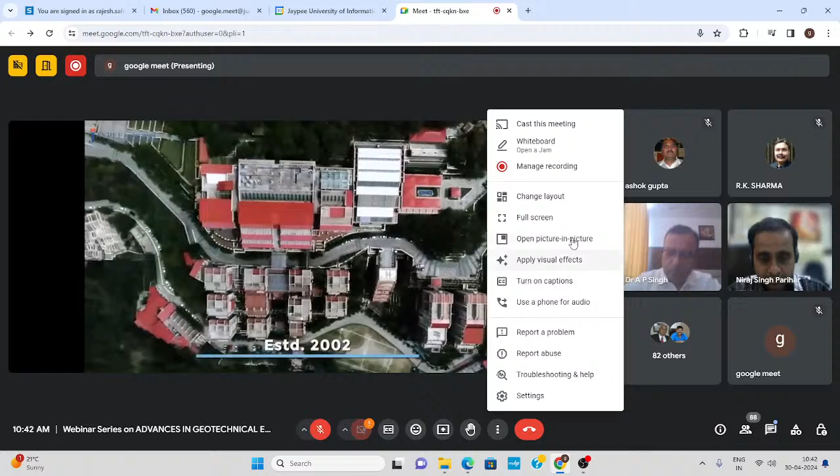Conceived as the joint vision of the Government of Himachal Pradesh and the founder chairman of Jaypee Group, Shri Jaiprakash Gaur, JUIT Solan is the first private university of Himachal Pradesh, established in 2002. Over the last two decades, JUIT Solan has been relentlessly pursuing its mission of contributing to a better world by cultivating creativity and advancing fundamental knowledge through education among students.

Adorning the picturesque slopes of Waknaghat hills in the Solan district of Himachal Pradesh, the university campus spread across 25 acres provides a peaceful and serene setting in the lap of nature for young minds to hone their skills for a brighter future.

JUIT offers undergraduate, postgraduate, and doctoral programs in various fields of study, including computer science and engineering, information technology, electronics and communication engineering, biotechnology, bioinformatics, civil engineering, and management. JUIT has been producing polished graduates who are working as experts in various fields in the country and abroad. More than 200 alumni have become acclaimed professionals in countries like Canada, America, and also Europe.

As Dean Academics and Research, I have had the privilege of witnessing a remarkable journey here. We aim to provide an educational opportunity to one and all, irrespective of their background. In JUIT, our main aim is to produce industry-ready professionals and good human beings.

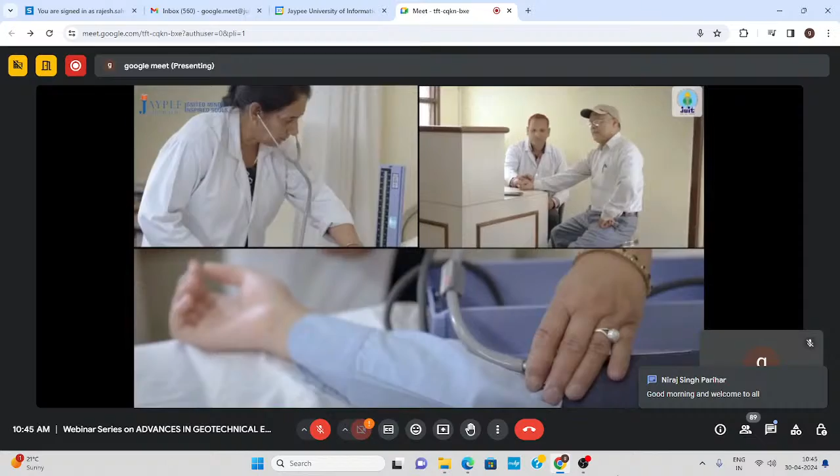The university campus makes life vibrant and enjoyable for students, both inside and outside the classroom. Handling 1900 students in the age group of 17 to 23 years is challenging.

In JUIT, we create a conducive ecosystem for a student to develop and nurture his or her personality besides the academic curriculum, providing excellent amenities in the hostels, good nutritious food, active sports fields, vibrant and diverse co-curricular activities clubs, NCC, etc. These are all domains which fall in my responsibility as the Dean of Student Welfare.

The university exposes its students to placement teams from several well-known companies, and the students here in this university get placements in organizations like Microsoft and Amazon.

JUIT Solan stands tall as an institution committed to academic excellence, holistic development, and industry relevance. With its focus on research and innovation, as JUIT graduates step into the professional world, they carry with them not only knowledge but also the skills, values, and perspectives necessary to make a positive impact on society.

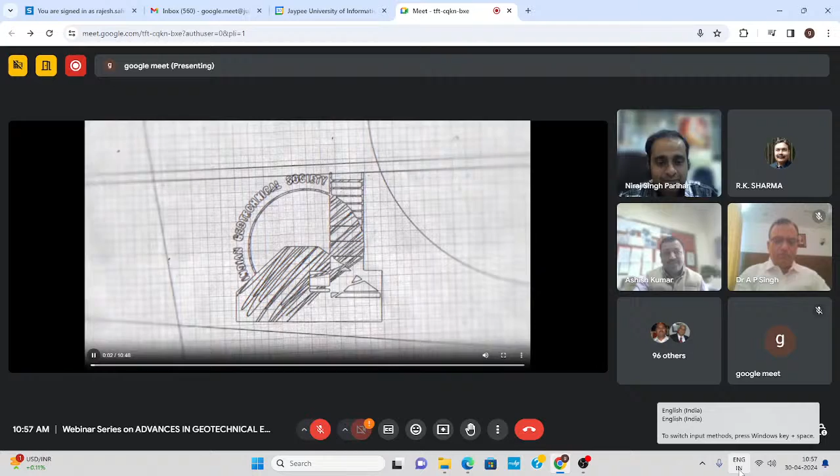The Indian Geotechnical Society, earlier known as the Indian National Society of Soil Mechanics and Foundation Engineering, was established in 1948, soon after the Second International Conference on Soil Mechanics and Foundation Engineering held in Rotterdam. The society was affiliated to the International Society that same year and has since strived to fulfill and promote its objectives.

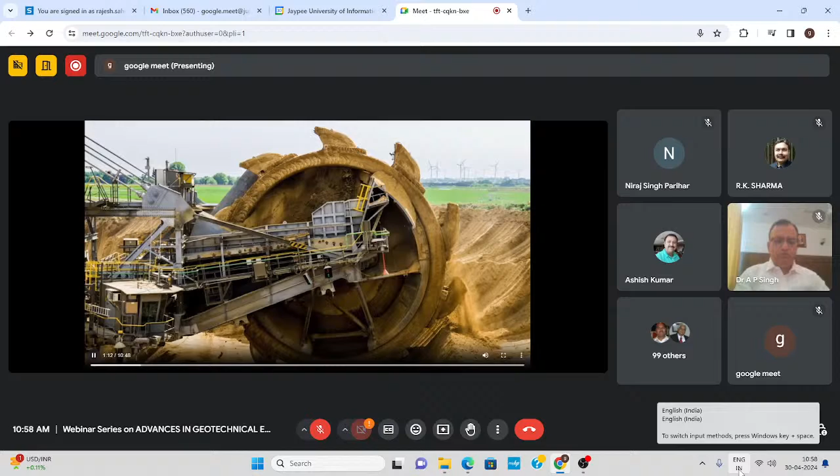The name Indian Geotechnical Society was adopted in 1970. The vision of founding president Mr. Khosla and honorary secretary Dr. N.D. Gulati was to build the society to promote cooperation amongst engineers and scientists for the advancement and dissemination of knowledge in soil mechanics, foundation engineering, soil dynamics, engineering geology, rock mechanics, snow and ice mechanics, and allied fields and their practical applications.

As the geotechnical community grew, the International Society decided to hold regional conferences for each continent along with four-yearly international conferences. The first Asian Regional Conference was held in 1960 in New Delhi. India also hosted the 5th Asian Regional Conference at Bangalore in 1975, and the 13th at Kolkata in 2007.

IGS has been organizing national conferences annually in different cities since 1961. The Silver Jubilee Conference was held at Kurukshetra in 1973. The 1978 GeoCon was a landmark conference held at IIT Delhi, inaugurated by the then Prime Minister Morarji Desai.

IGS started the prestigious annual lecture in 1978, a tradition followed till date. The first one was delivered by Professor R.K. Katti. Several others who delivered the annual lectures include Professor Dinesh Mohan, Professor T. Ramamurthy, Dr. R.K. Bhandari, Professor Gopal Ranjan, Dr. B.G. Rao, Dr. N.V. Nayak, Professor G.V. Rao, Professor A.V. Shroff, and most recently Professor M.N. Viladkar.

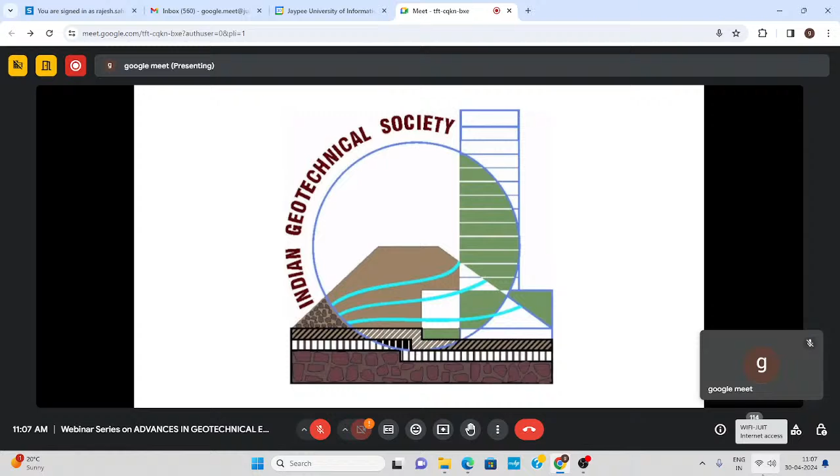As we celebrate the 70th year of the Indian Geotechnical Society, the possibilities that we look forward to are limitless. Here's to saluting the past, celebrating the present, and welcoming the future.

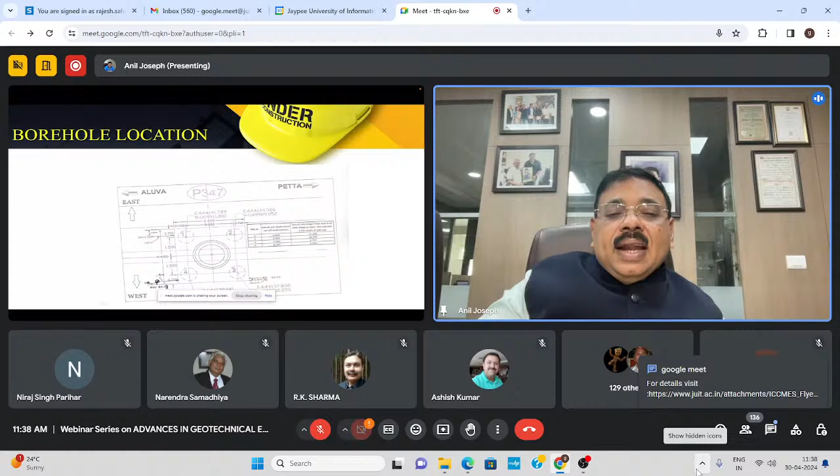So why has it happened suddenly? Because there was heavy flooding in the previous season, and due to this imposed loading, the frictional component has totally gone, and the soil started pressing into the softer formation. So everything was studied in detail.

So now, as a forensic investigation, we found out the reason for that, and now we have to come up with a solution. The trains are running on the top, we cannot dismantle everything. So we decided to underpin the tilting pier cap and the foundation. We went in for an additional 4 piles, and underpinning was carried out.

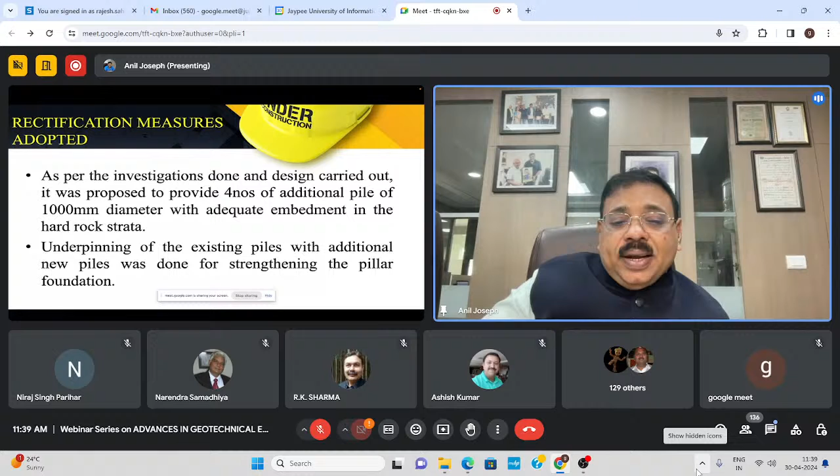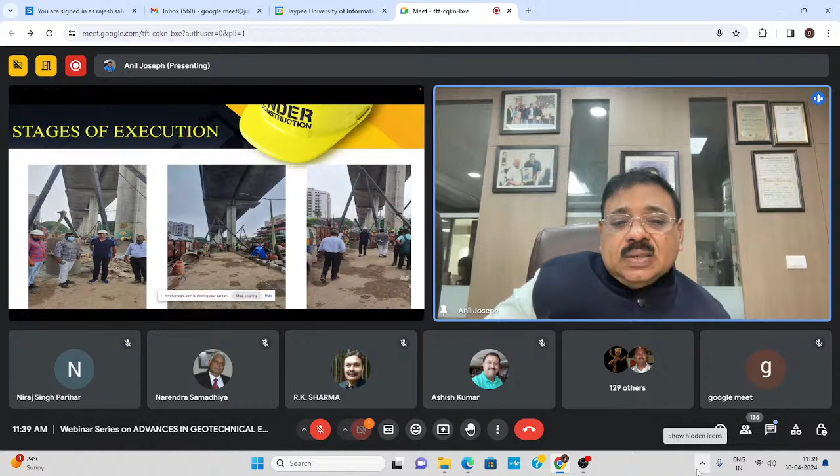So here you can see myself guiding the team, and we cannot bring in big hydraulic machines because the trains are already running on top and we cannot disturb the system. So a 24/7 monitoring mechanism was done. The work was carried out, and specialized equipment like chiseling systems and breaking the rock to get 1.5 meter anchorage using hydraulic drill systems was also implemented. The work was progressing slowly, and the integrity test was conducted.

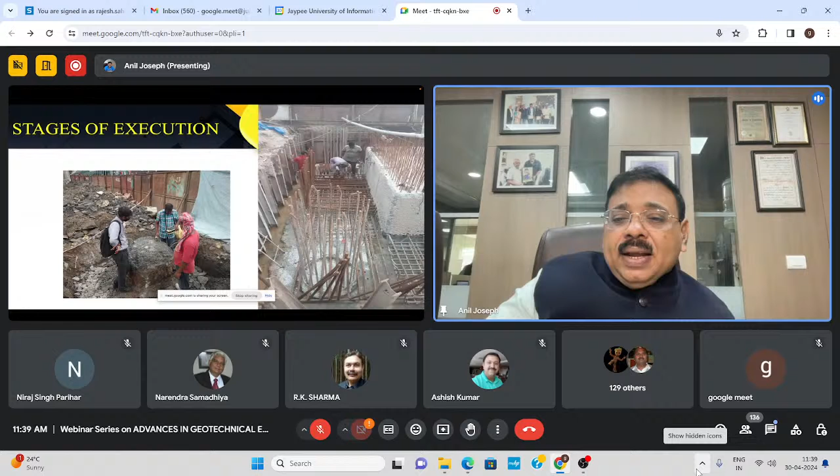Now here in this picture you can see the additional pile getting done, and we are anchoring using high strength Hilti anchors. About 1,400 rods were anchored into the old pile cap to connect it together with the new one. And now you can see here the old pile cap, and the new pile cap where the loads will get transferred, and strong structural systems were also made so that the load gets bypassed to the new pile system.

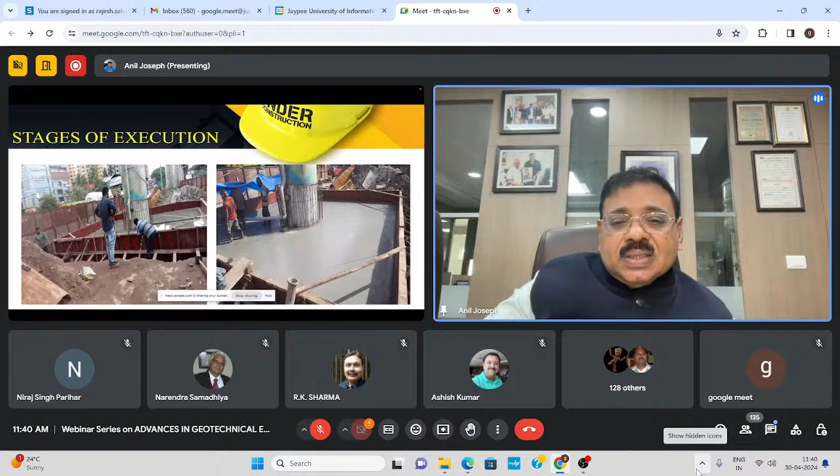And in order to prevent the damage, this time we have taken the casing down to the bottom up to the rock to ensure that there is no side collapse happening, and the concreting is done immediately. So the entire work was completed. The entire thing was observed, and we found that everything has become stable, and now we are able to successfully get the lines running, and both the metros are running parallelly, and it's all solved, and it's still being continuously monitored. This was done last year. So this was my first story.

And my second story again deals with a failure of a touch pile system for a commercial building at Cochin. And if we come to Cochin, some of the world's best cruises come and visit us. And we have a very beautiful natural harbor. This is protected, so we don't need any breakwater structures. And this is where the city is. This is the natural protection, and we have a huge LNG terminal here.

And we have a beautiful Dubai port project here with the container terminal, and this is the LNG terminal, and the ships come in and sail into our harbor. So these are all the shipping facilities available, and we have a lot of fishing nets. These are the so-called Chinese fishing nets, and fishing is one of the major industries here.

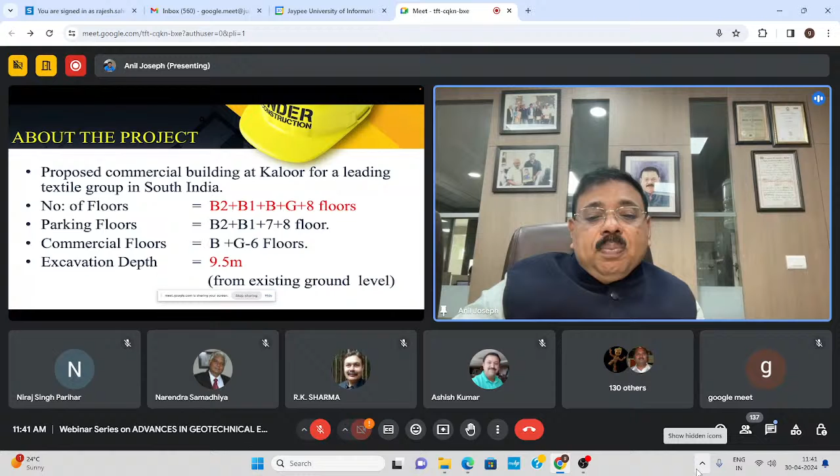So this story is of a commercial building having 3 basements, ground and 8 floors. They had parking floors at the basements and ground, and 7 and 8 was parking, and the other areas were commercial floors. So they had to excavate to a depth of 9.5 meter, and this was the location of the project.

And in order to make this excavation going up to about 10 meter, they had 337 piles of 90 centimeter diameter going to a depth of 30 meter. And they also provided 28 soldier piles of 600 mm diameter to a depth of 30 meter. Building piles were taken to a very dense sand strata at a depth of 43 to 46 meter.

And why have we gone for this touch pile with a propped system? Because once you have a cantilever, it is WL²/2. The moment you have a propping at the top, it becomes WL²/8, as a propped cantilever, and bending moments come drastically down. And the soldier pile is to economize the design of the strutting systems, because the span gets controlled with the soldier pile as a support in between, so the section can be optimized. So these are applications of basic engineering knowledge in the field.

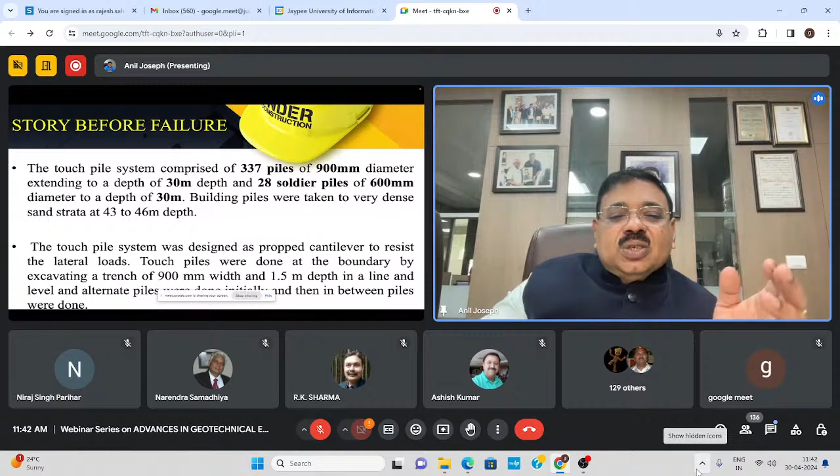So the work was carried out there. In phase 1, they went up to 2 meter. Phase 2, they went up to 6.5 meter, and phase 3, they went up to 9.5 meter. And here you can see a video when the work is going on. So this is at 5:30 in the evening.

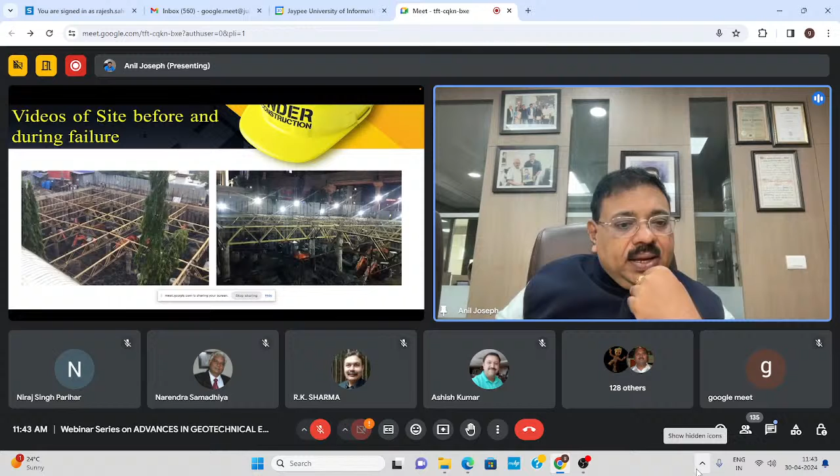So you can see that the work here is the touch pile system, all in place. This is the strutting system. This is the soldier pile, and work is going on full-fledged. So by about 7 o'clock, there was a slight movement, and the wall started creaking, sounds started happening.

The engineer in charge was a very young, dynamic engineer, so he immediately informed the district disaster management team headed by the district collector that such a problem is happening at this site. And I was representing the district disaster management as the engineer, structural engineer, and foundation engineering expert. And I was asked by the district collector to go and have a look.

So by the time we reached there by 8 o'clock, we see that there are about 20 to 30 people working below and trying to provide support to the structure. And immediately we asked to evacuate those people. And by 9 o'clock, this is what happened.

So here you can see that as the thrust became higher from the retaining wall, it started pushing, and the soldier pile got sheared off, and the strutting system failed. So suddenly movement jumped, and the failure happened. So this is what happened, and this is the write-up of that.

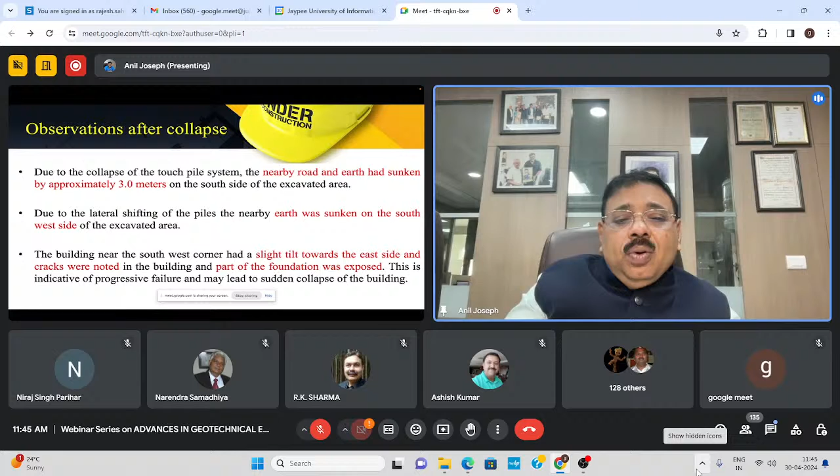So here, if you really see, you can see the equipment lying down below. The strutting system failed. The nearby road has gone down. Earth sunk slightly towards the side, and there were cracks. Electricity and water supply got disrupted. The roads got stuck, and the Kochi metro also came to a halt, because we have to analyze what went wrong before allowing the traffic to move on.

And again, a committee was formed to find out the reason for the collapse of the touch pile system, whether they had satisfactorily obtained the statutory government approval, and whether we will be able to do the construction using this touch pile system again. So these were the steps taken by the district management committee, and I was taking the structural engineering lead role in that.

So we rerouted the public traffic, refilled the excavated area, 2-layer sheet piles were provided, and the inner side of the sheet pile was filled to counter the lateral force. Because once it is a 10-meter cantilever, it is WH cubed by 6, and if we can fill it by 5 meters, then it is much safer.

The core test and integrity test were carried out to find out the root cause, and to rework the road and bring it back, we went for coconut pile systems, and we made innovative geocell formations to control the loading, and within 4 days we were able to get the road back on track, and additional soil investigation was carried out.

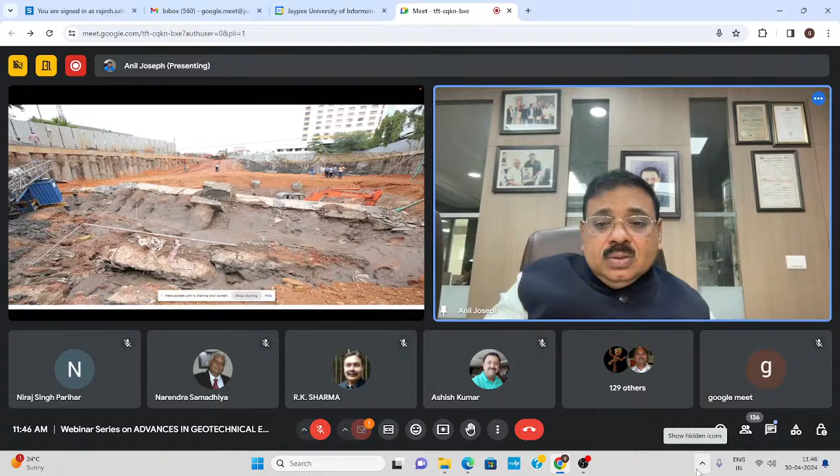So here you can see that the pile has come out, and the works are being coordinated. Here I am instructing the team how to go about it, and here you can see the double sheet piling system, and here is where the metro was running, and this is the refilling that was done to control the pressure and to understand what has gone wrong.

So this is the double layer sheet piling system, braced, and you can see that the pore pressure dissipation system was provided, and water was drained out in order to prevent damage. And then we went for concrete core test, pile integrity test, additional soil investigation, and then all these data were collected, and then we went for geotechnical and structural analysis using Plaxis and STAAD models to work out the root cause of the problem.

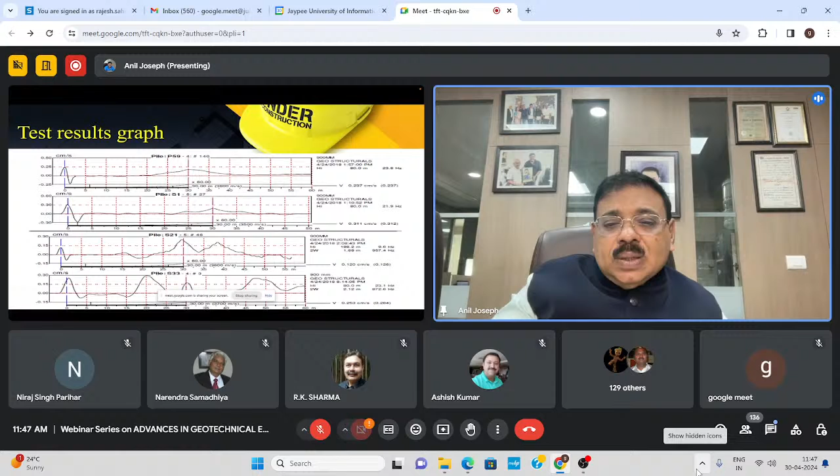So here, this is the integrity, core, and soil test happening. And we found that, again, the strength of the concrete was good. The depth of the pile was 30 meters. And the integrity test pointed out that the pile was sheared at a depth of 14.5 to 15 meters. Thanks to the Geodynamics team led by Ravi Kiran, who supported me in this testing process.

And this is the soil report, and the design was studied with in-depth analysis models, and the capacity was worked out. So we found that this 90 centimeter dia pile going to 30 meters with the reinforcement provided can take a capacity of 815 kilonewton meter.

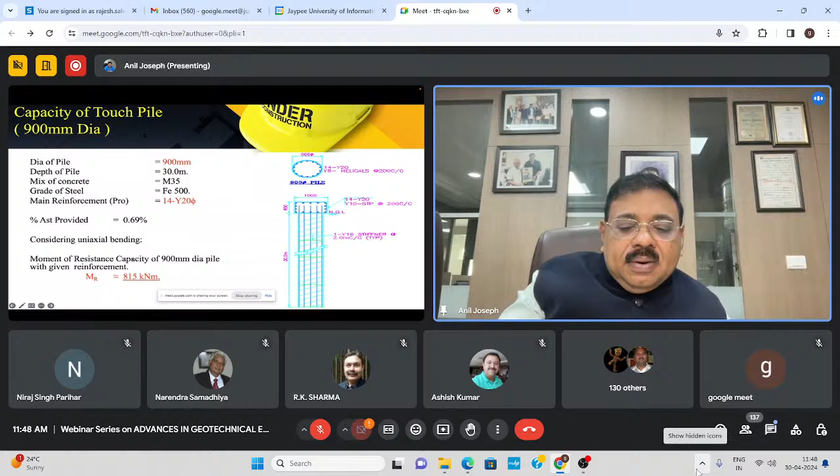Then we did modeling on different cases, because we have to convince the authorities also what went wrong. So 5 meter retention, 6, 7.5, 9.5, various case studies were done. At 5 meters, we found the factor of safety is quite good. There is no problem.

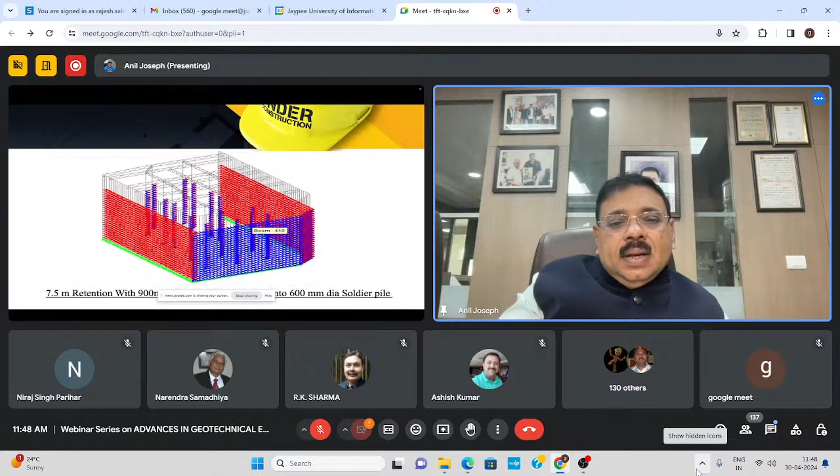At 6 meters it is still a temporary structure; a factor of safety of 1.3 is there. And once we move to 7.5 meters, the touch pile alone cannot take care. So we should have the strutting system and the soldier pile working to control the system. So this was the strutting system. And this is the three-dimensional model with the springs formed to simulate.

And this is the utilization ratio of the truss elements worked out. And we found that at 7.5 meters, it was also nearing the limit. And once we moved to 9.5 meters, we found that the moments are much higher. The strutting system was a bit inadequate to handle that. So here you can see that these are the soldier piles.

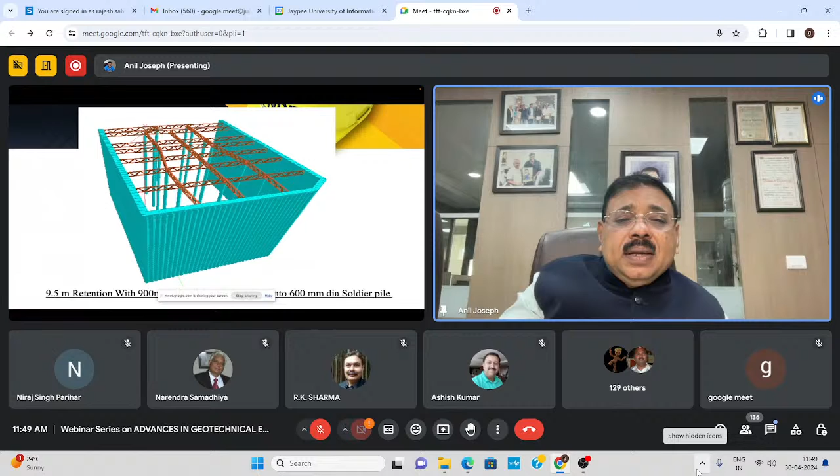The strutting system was modeled and analyzed, and we found that the strut system was inadequate. The soft soil has yielded and liquefaction has happened. And for the point of fulcrum in the design, they had assumed that after 10 meters there is fixity. It moved down to 14 to 15 meters, and the moments jumped drastically. And that was the major reason for the collapse, leading to increased unsupported length, and a second tier of strut system at lower depth could have prevented this.

So the analysis was carried out, diagonal cross bracings were suggested, and we asked them to move it back by another 5 meters, and we have given them permission with the second tier of strutting to carry out the work and complete the process. So it was just sheer luck and timely intervention that there was no loss of human life. And there was only one building which had to be dismantled because its foundation got exposed and it got tilted, and everything was carried out.

The rework was done with total instrumentation and monitoring, and the entire thing is completed, and the work is open and is functioning right now as a textile showroom. So here you can see the metro also.

So now coming to the third story of monitoring vibration impact during high-rise demolition, and we'll take you to Delhi for the story of the Supertech Twin Tower, Noida. In my career, I have been a structural engineer primarily, more than a geotechnical engineer, and I have done more than 3,500 high-rise structures. And there were a few stories where I had to become the demolition expert also to get the building down.

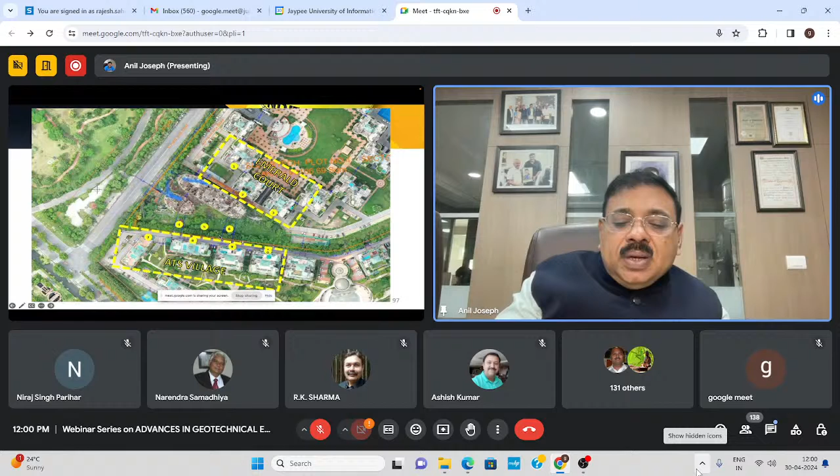And thanks to CBRI, which was appointed by the Supreme Court to be part of that. The way I was representing Government of Kerala in the 2020 blast, this time we had CBRI checking our design and verifying all the documents which we are submitting from the engineering perspective. So every wall, every crack was monitored, measured, and put into record.

And also I insisted on having the current strength of that by going for NDT testing, such as rebound hammer, pulse velocity, and all records were made and submitted to court before the blast. And after the blast was completed, we did the resurvey to assess what was the damage. And in case of any damage happening, the entire area was insured for 125 crores.

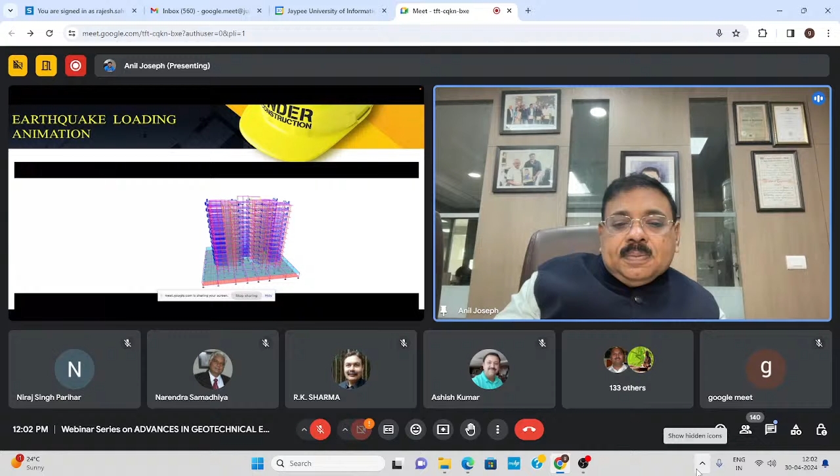So here you can see in this video how the behavior is happening and how the building is oscillating under the impacts which happen during an earthquake in this case. And when we move to this video, it shows how the blast is going to affect, and we have to ensure that the structures are safe during that process. So here you can see that the buildings are moving, what is the effect, and we compared with the earthquake modeling.

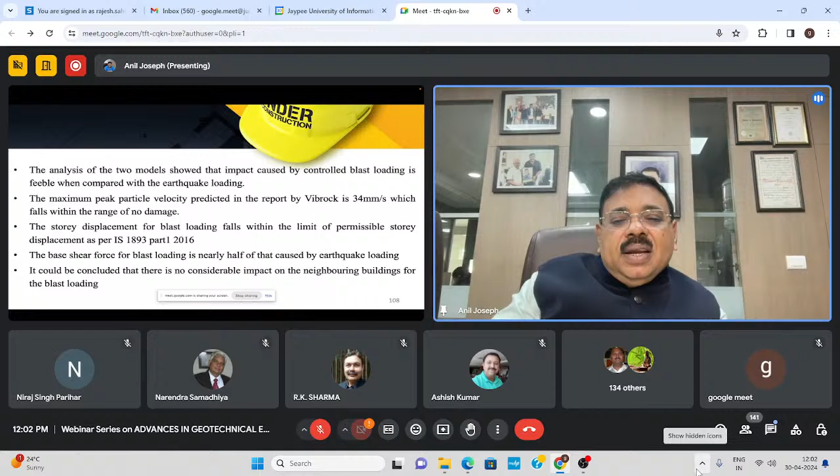And also you have to do stage-wise analysis because we are ripping the building. So you have to ensure that the building is safe in all the different processes, even if an earthquake comes and hits the building during the time of the operation where you are doing the preparatory work. So that was also carried out. That's why it took almost 6 months of engineering to do the job, and everything was simulated. And as per the code, we proved that it is safe.

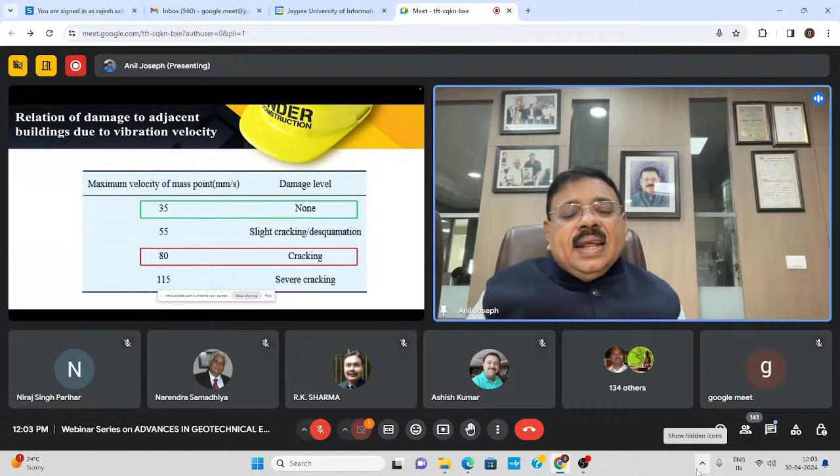And it is very simple. If you can control the impact to less than 3.5 centimeter per second, there won't be any damage. And if it is more than 11.5 centimeter, the entire surrounding buildings will have heavy damages. So I would like to thank the team from IIT Madras, headed by Professor Boominathan, who was part of the team to measure the vibration impact.

So we had accelerometers, geophones, all spread across the area, picking all the data when exactly what is going to happen. So we had to evacuate about 5,000 people, about 3,000 cars, 300 pets, and we had about 40 ambulances ready and 400 bed hospitals ready, so that in the case of an eventuality, the emergency can be put into operation.

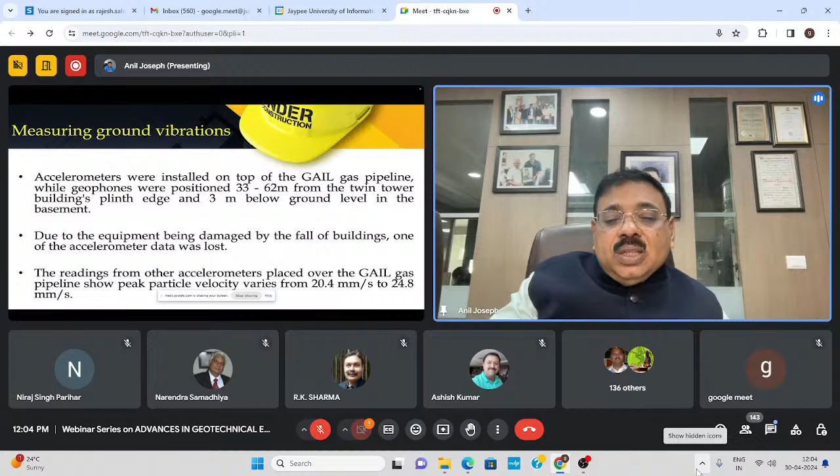And we had a team of about 2,000 police people and 20 fire engines ready in case something goes wrong in the planning of the 9 seconds operation. So here you can see the points where the vibrations were measured. So thanks to the team from IIT Madras, who was in charge of measuring and monitoring. Accelerometers, geophones, everything was measured, including the gas pipeline, which was monitored continuously during the process. So this is what happens exactly when the blast is happening.

So these are the controls. All the vibrations were well within the permissible limit. It was all monitored, measured, and rechecking was done. Not much damage happened to the surrounding. It was a 99.4% blast, a perfect blast, where we had a small problem of a compound wall collapsing and 4 trees we lost. So that was the only damage which happened.

So this was that demolition day, 28th August 2022, and at 2:30 p.m., as per the direction of the Supreme Court, we went for the blast, and this is what we did.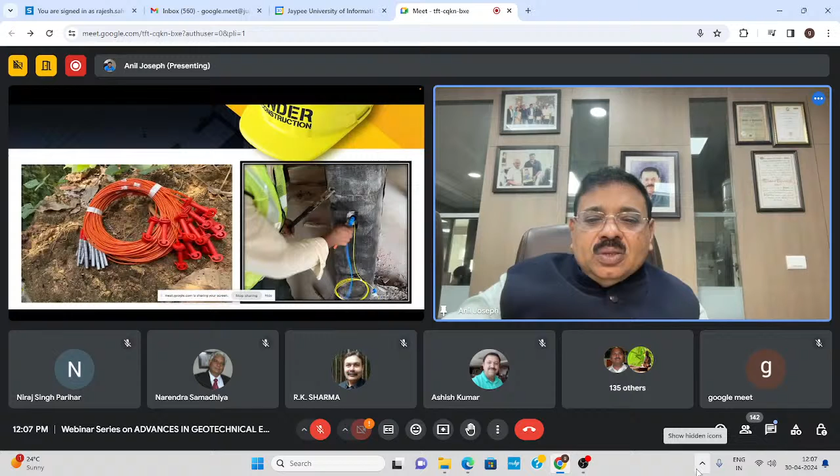So this is before; the buildings were there, it is no longer there, it is gone. The entire debris was recycled, and then steel went for recycling again, and the entire work has been completed and handed over. So this is how we drill the hole and place the wires. It is a 2-layer protection wiring system.

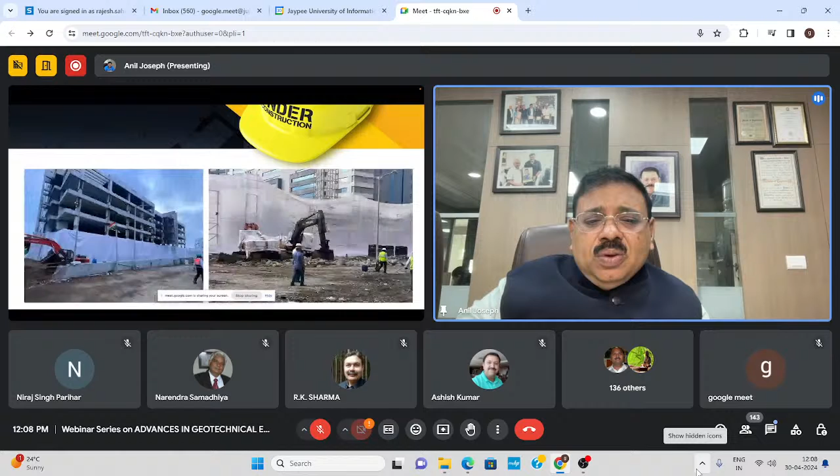So I will just go through; the same process was continued. All the buildings were monitored, measured, and we'll just look into the video of how we went for the blast, and it was the same team. So this is Joe and myself, and Kevin and myself, the team who are doing the job. So let's see this video.

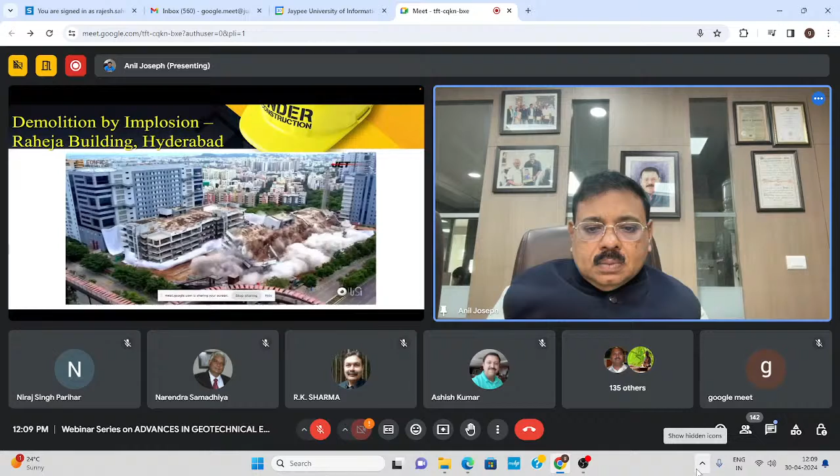So with that, this is the last video I would like to show. I would like to close with this message: the only place where success comes before work is in the dictionary. So keep working, and engineering is all in the field. Make sure that you convert your knowledge gained from the colleges into the field and make a difference to society. I am open to any question and answer session, and thank you all for a patient hearing.

Thank you very much, sir, for that insightful lecture. It is really astounding to see how you are managing to bring these buildings to the ground without disturbing the other buildings in the vicinity. That is a very careful job to do, really. So with your kind permission, may I read out the questions and queries in the chat box?